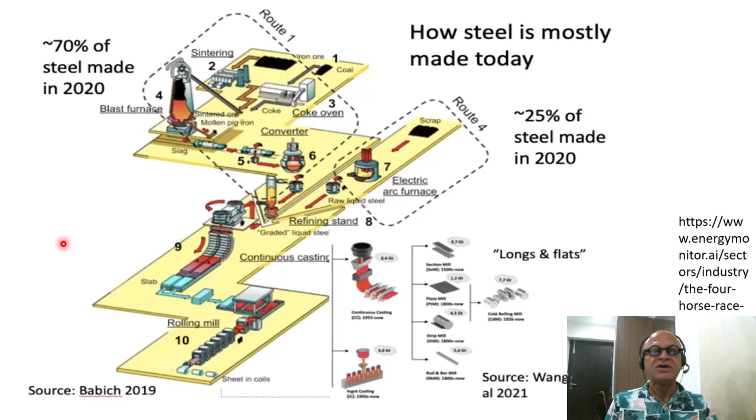Coming back to India, India requires strong demand for clean, low carbon steel to decouple industrial emissions from economic growth. So there is the supply side where big companies are producing steel, and then there is the demand side, which we'll look at, obviously infrastructure, buildings, and various other production processes. So can the demand side push for clean, low carbon steel? That's something we have to think about.

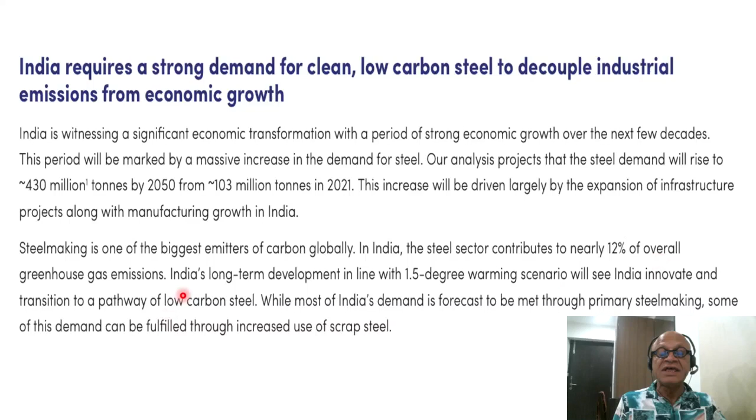There's a lot of numbers here I won't go into, but we'll look at the key ones. For example, 430 million tons by 2050 from 103 million tons in 2021, in terms of the expected demand growth. So steel making is one of the biggest emitters of carbon, and the Indian steel sector contributes nearly 12% of overall greenhouse gas emissions for the country. So it's obviously higher than the global average of 8%. It's a dirty industry in that sense.

The India Net Zero Steel Demand Outlook report's main findings examine the nature and characteristics of steel demand in India, provide a view of the low carbon steel opportunity at a sectoral level with focus on key sectors such as automotive, construction, infrastructure, and capital goods. It underpins the importance of demand-side policy action for a greater demand-pull for low-carbon steel, and identifies policy insights learning from other geographies, so other countries are looked at for contrast. It highlights the critical role of global standards and certifications that steel producers can adopt to meet an early trajectory.

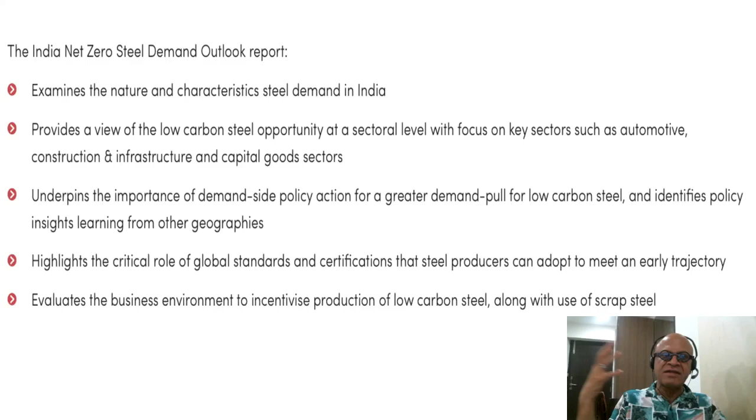It evaluates the business environment to incentivize production of low carbon steel along with use of scrap steel. So there are some ideas provided for how to collect scrap and then feed it to new steel manufacturing, and reducing the direct or primary steel production from iron ores.

Further, Steel Zero, the Climate Group's initiative, brings together ambitious and forward-looking steel buying organizations to harness their collective purchasing power and send a demand signal in shifting global markets and policies for responsible production and sourcing of steel. This seems to work for many industries when customers, buyers, consumers demand greener products. Industries pay attention.

Whether there is greenwashing and whether there is transparency in reporting, monitoring, and verification of these so-called green methods and green products is a big task, just like organic food, for example, where people buy things labeled organic, but then there are lots of issues about who's making sure that they in fact are organic.

Works for recycling as well. Many things that are supposed to be recyclable are actually not recyclable in reality, and so on. So this is a constant battle.

Businesses that join Steel Zero make a public commitment to use, procure, and specify 100% net zero steel by 2050. So this is an initiative from Climate Group.

The India Net Zero Steel Demand Outlook explains the criteria for buyer-side companies who make this commitment, and interprets broadly the standards of responsible steel for steel producers. The report will serve as a vital tool for companies pursuing a net zero strategy to reduce their scope 3 emissions - we'll see that in a minute - and for investors and philanthropic donors in identifying gaps in mobilizing concerted and well-rounded action on decarbonization of steel.

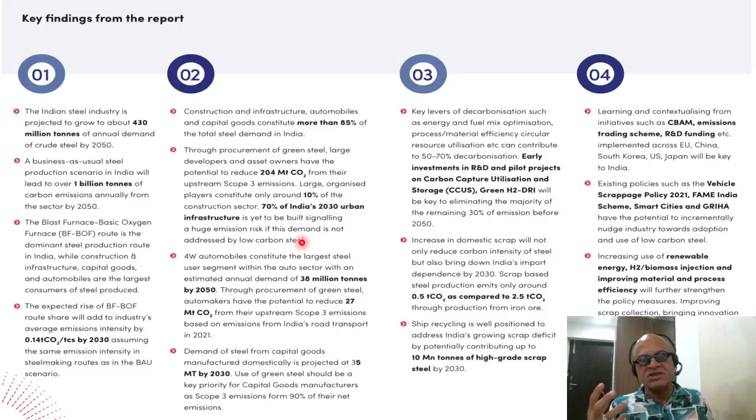Large organized players constitute only around 10% of the construction sector. 70% of India's 2030 urban infrastructure is yet to be built. So like China, India is going to keep on building enormous amounts of infrastructure projects, undergoing implementation of many projects for roads, bridges, even charging stations, and so on.

38 million tons by 2050 in terms of automobiles, and 27 million tons of CO2 from their upstream scope 3 emissions. Demand of steel from capital goods manufactured domestically is projected at 35 million tons by 2030.

So green steel should be a key priority in this sense, as scope 3 emissions form 90% of their net emissions. Thirdly, early investments in R&D and pilot projects on carbon capture, utilization, and storage, and green hydrogen-driven direct reduction iron are required to meet the goal of eliminating the majority of the remaining 30% of the emissions by 2050.

These are kind of the key levers that are identified. Scrap-based steel production emits only around 0.5 ton CO2 as compared to 2.5 ton CO2 through production from iron ore, so primary versus secondary there.

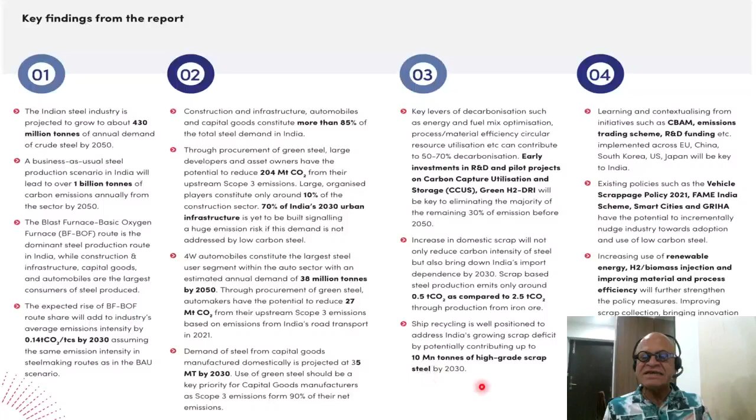Ship recycling is well positioned to address India's growing scrap deficit by potentially contributing up to 10 million tons of high-grade scrap steel by 2030.

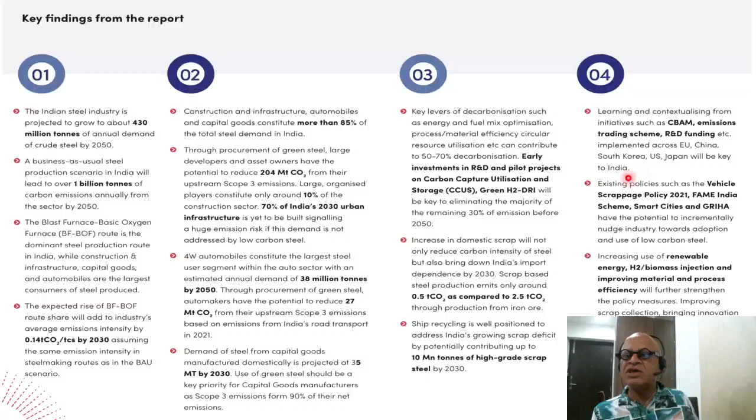In terms of policy levers, learning and contextualizing from initiatives such as CBAM, emissions trading scheme, R&D funding, etc., implemented across EU, China, South Korea, US, and Japan will be key to India as well. So India can learn from those.

Existing policies such as the Vehicle Scrappage Policy 2021, FAME India scheme, Smart Cities, and GRIHA have the potential to incrementally nudge industry towards adoption and use of low carbon steel. We'll look at some of these acronyms later, but you can look them up - I'm not going to go into the details.

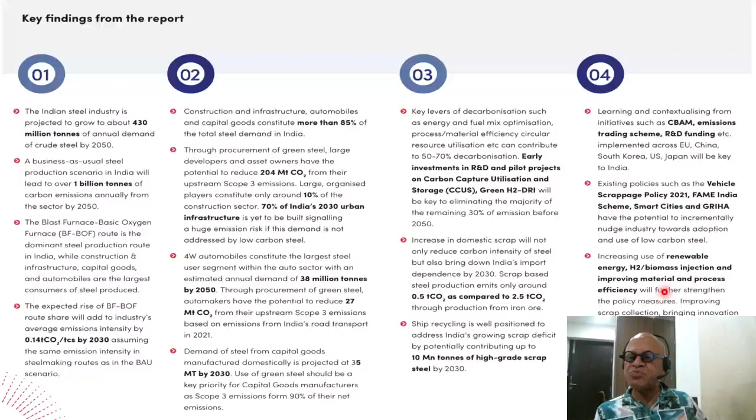Increasing use of renewable energy, H2 or biomass injection, and improving material and process efficiency will further strengthen the policy measures. Okay, so let's look at some numbers after looking at these important findings.

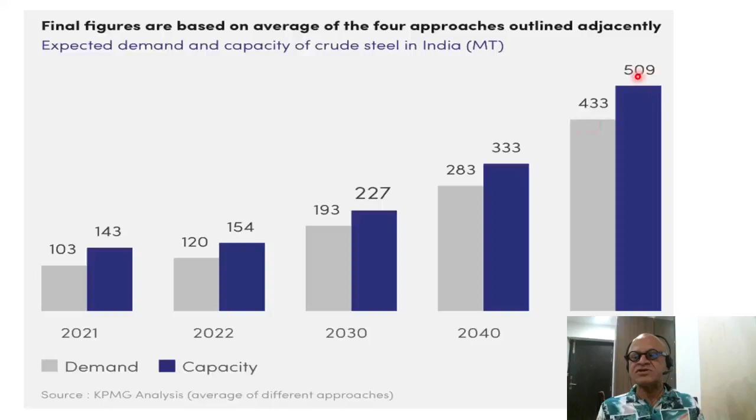So grays are the demand and capacity is in blue. Demand has been at 103 million tons in 2021, and supply or capacity at 143 - that's not necessarily supply. In 2022, 120 to 154, both have gone up. By 2030 they are expected to further go up, demand to 193 and capacity to 227. By 2040 and 2050 we are up here at 433 million tons versus capacity of 509 million tons.

In the business as usual scenario, where nothing is done, we essentially continue with current practices. These do not decouple emissions from production, and this may lead to over 1 billion tons of CO2 emissions annually from the Indian steel sector by 2050.

In 2019, India emitted around 2.5 gigaton CO2 - not equivalent, so CO2 itself - 7% of global emissions, with the steel sector contributing around 304 million tons, so that's 12% of total India emissions, higher than the global average of 7%.

In India's CO2 emissions, power generation dominates, but iron and steel industry is at 12%, and of course agriculture is a major player, with buildings and transportation adding the rest.

Emissions by scope: scope 1 is at 68%, which includes the supply of feedstocks, etc. Scope 3 is at 28%, which is pretty high. Scope 2 is in the manufacturing process. So scope 1 and 2 cover the step of producing steel, and scope 3 is after it's been produced.

Emissions from steel demand - demand and emissions in a business as usual scenario. You can see that business as usual is obviously much higher than in the emissions scenarios meant to meet commitments to NDC and global warming targets, etc.

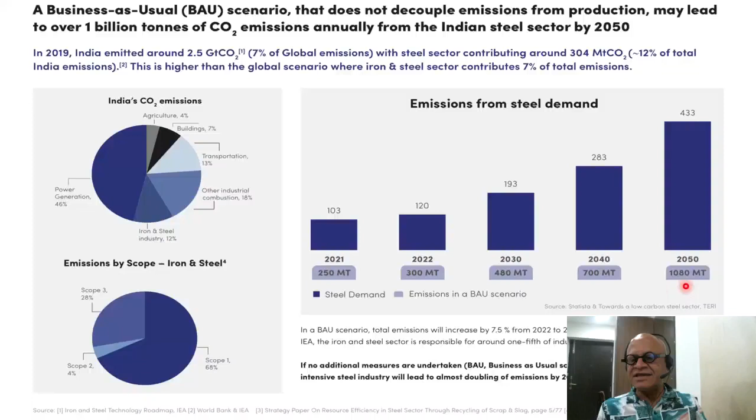So obviously India needs to do something. The route-wise capacity of India in 2021 and 2022: direct reduced iron versus blast furnace and basic oxygen furnace - this still dominates at 43%, with electric arc furnace at 6%, and scrap electric arc furnace at 25% in terms of capacity.

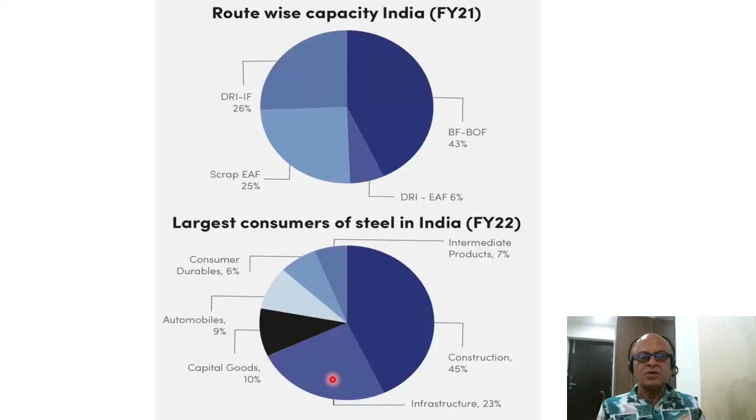The largest consumers of steel in India in 2022: intermediate products, consumer durables, automobiles at 9%, capital goods at 10%, infrastructure dominates at 23%, and construction is at 45%. So lots of new buildings coming up in a developing economy, and infrastructure corresponding to that in terms of trains, roads, bridges, dams, and so on.

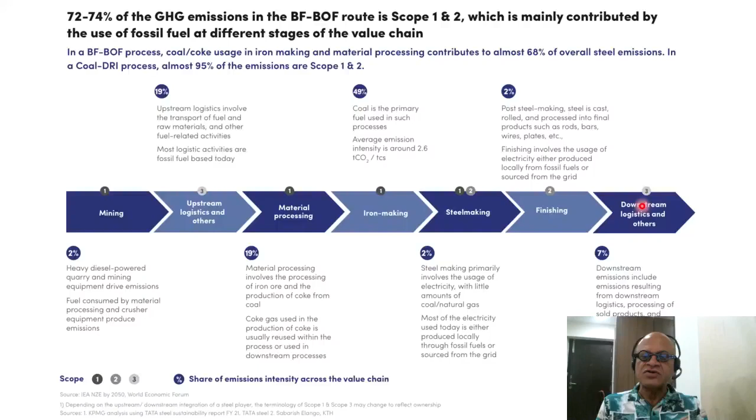72 to 74% of the greenhouse gas emissions in the blast furnace basic oxygen furnace route is scope 1 and 2, mainly contributed by the use of fossil fuel at different stages of the value chain - including mining, upstream logistics and other, material processing, iron making, steel making, finishing, and downstream logistics and other. Everything else that comes after in terms of use is scope 3.

Clear pathways exist for effective and efficient deployment of levers that can impact the entire value chain of steel production. These levers include energy and fuel mix optimization, process and material efficiency, circular resource utilization, and carbon capture and storage or offsets - obviously these are technological promises here.

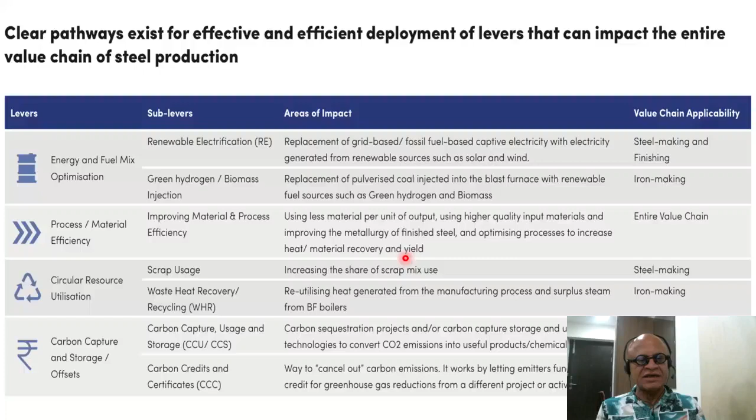As available levers can achieve 50% to 70% decarbonization, net zero initiatives will be key to create an ambitious demand pull, fostering much needed innovation to meet 100% decarbonization by 2050.

Just look at the key words here: circular use, process and material efficiency, energy and fuel mix optimization. Total of above mentioned pathways is only 50 to 70%. Carbon capture and utilization, hydrogen and offsets are the remaining 50 to 30%.

Implementation drivers in each of these include technology, ecosystems, and cost. You can see the favorability in terms of green being high, red being low or not available, and orange being moderate. So you have to map those things correspondingly.

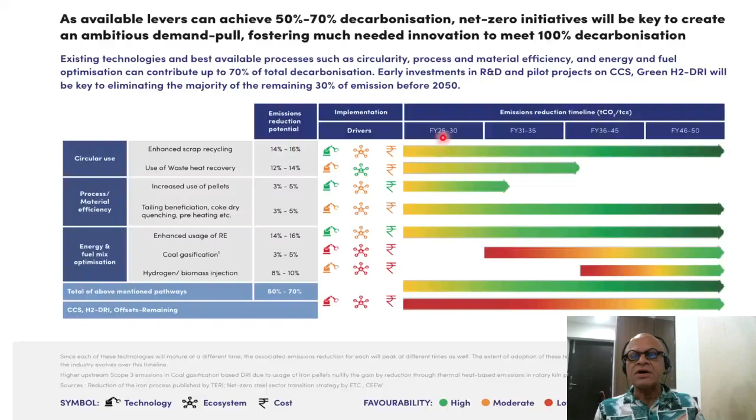Emissions reduction timelines in tons of CO2 per ton of steel produced. You can see FY 25 to 30 has a low extent of adoption of each of these, and it has to hit high by the time you get to financial year 46 to 50.

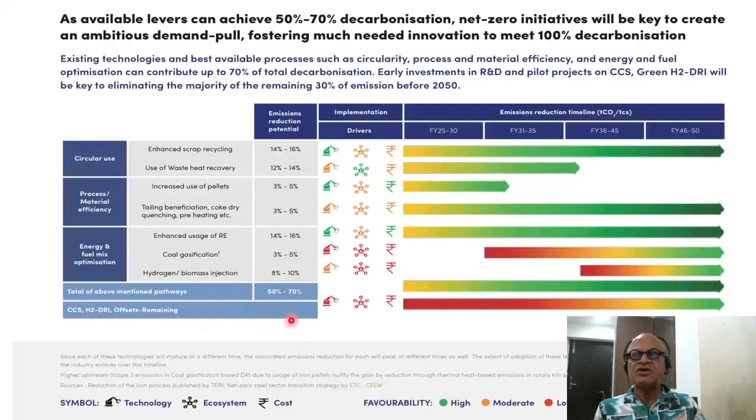Use of waste heat recovery has to basically max out in terms of full adoption by the 30s, and similarly process and material efficiency have to reach full adoption. Energy and fuel mix will go on for some time, but by 2050 everybody has to reach high adoption for accomplishing this remaining 50 to 30% to reach 100% decarbonization.

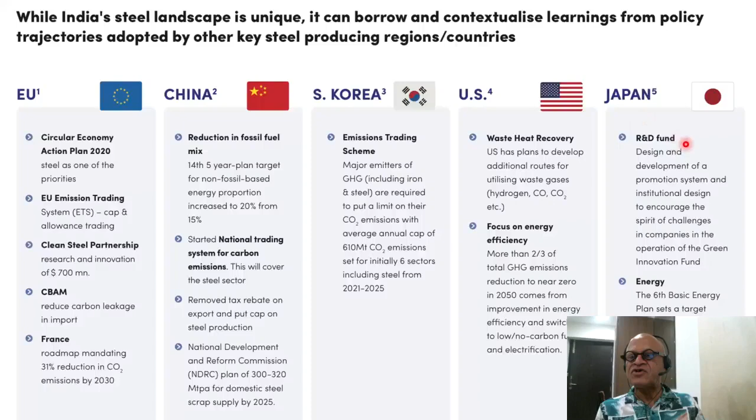US can give ideas on waste heat recovery and focus on energy efficiency. Japan has lessons for India in terms of R&D funding and energy.

The steel sector needs to respond fast and effectively to meet India's nationally determined contributions as well as the net zero goal by 2070.

There are various ideas for NDC, updated NDC commitments. India has submitted its plan. It has joined the International Solar Alliance, and there are Bharat stage emissions norms in place.

According to the Energy Transitions Commission, embedded emissions from material usage are expected to represent more than half of an EV's lifecycle emissions by 2030, compared with around 20% of lifecycle emissions for an internal combustion vehicle today. So all these kinds of details have to be worried about.

National Action Plan on Climate Change is in place. Amongst these, Solar Mission, NMEEE, and NMSKCC have significant impact on providing directional guidance for decarbonization initiatives in the steel industry. You can look up the acronyms here.

For example, enhanced energy efficiency along with the solar mission gives us NMEEE, and strategic knowledge for climate change is the National Mission on SKCC.

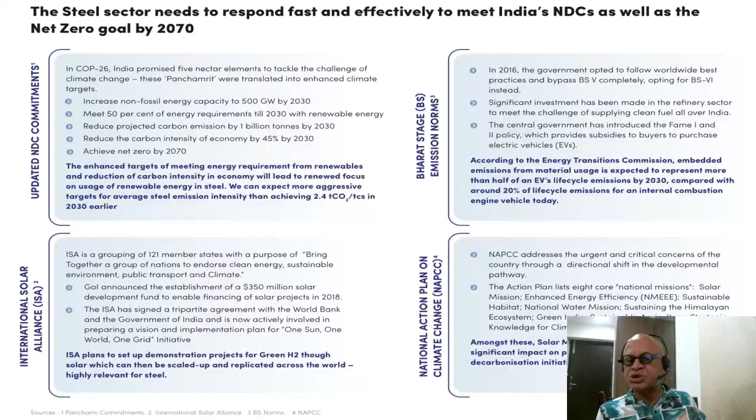Additional policies and initiatives can ensure the right pace for development and penetration of low carbon steel across industry segments and value chains.

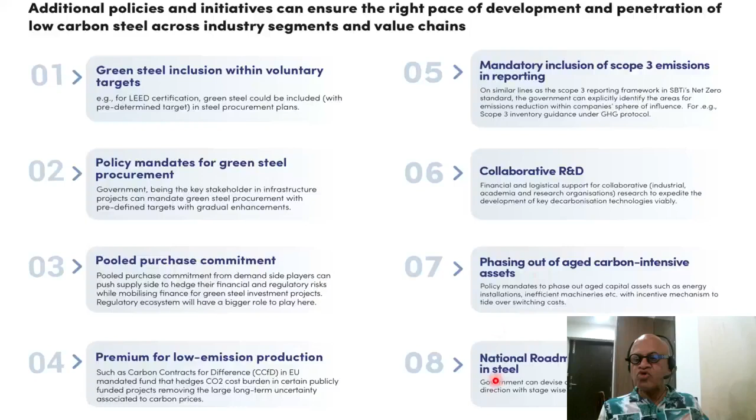Here, green steel inclusion within voluntary targets, policy mandates for green steel procurement, pooled purchase commitment, premium for low emission production in terms of incentivizing, mandatory inclusion of scope 3 emissions in reporting, collaborative R&D, phasing out of aged carbon intensive assets, and a national roadmap for decarbonization in steel.

So that's kind of a quick run through to see how the steel demand side pull on reducing emissions of steel production can be accomplished to help the net zero goals and the global warming target requirements by 2050.

Please go ahead and consult the report if you want more details. As usual, I'm very brief and pick points that I consider important from a very subjective point of view.